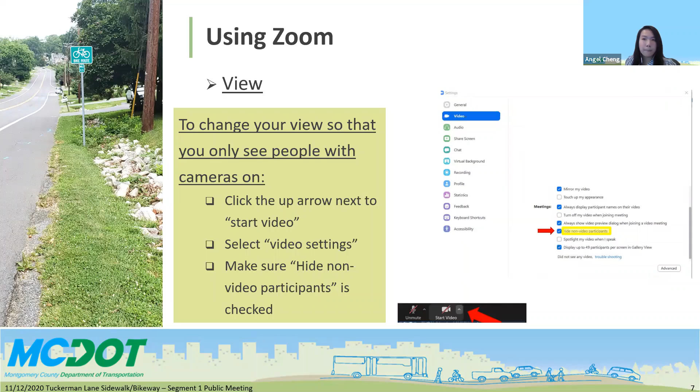We'll have a brief introduction. Hi everyone, my name is Angel Cheng. I am the project manager for this Tuckerman Lane Sidewalk and Bikeway project. We welcome everyone again tonight for joining us for the public meeting. We also have staff from other agencies, including Park and Planning and Maryland State Highway.

At this point, I'd like to ask if there are any elected officials or representatives here representing elected officials—if so, please raise your hand. Okay, no? That's okay, so we'll get started with the presentation.

Again, my name is Angel Cheng, and I am the project manager for this project. Here's a little outline for tonight's meeting: we'll talk about the project overview, go over some of the design considerations in developing this project, discuss the preliminary design we've put together so far, go through the impact analysis summary to explain what it means to build this project, talk about next steps and what happens after tonight's meeting, and then open the floor for everyone to ask questions or make comments.

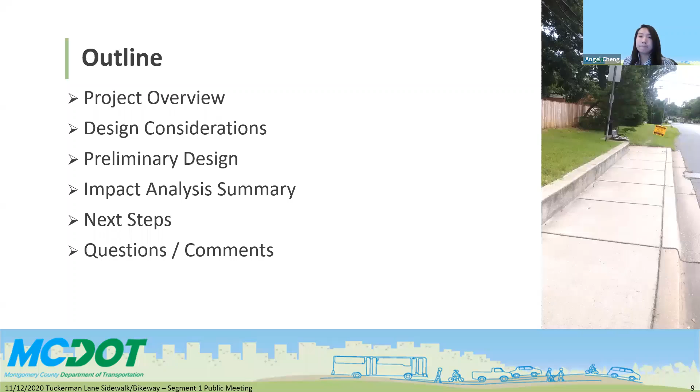Tonight's meeting outcomes are really just to share the preliminary designs with the community and to collect feedback from the community, see what you guys think about our project, and to answer any questions that you might have.

A quick project overview: this is Tuckerman Lane from Falls Road to Snakeden Branch, which is segment 1 of our Tuckerman Lane sidewalk and bikeway project. The scope of the project is to provide a shared use path along the north side of Tuckerman Lane, a sidewalk along the south side, as well as on-road bike lanes in both directions. We're also looking at how we can improve drainage and put in stormwater management facilities. This project is not currently funded for final design or construction.

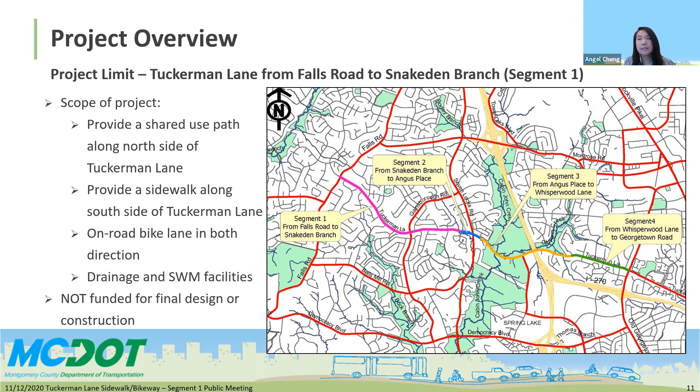A little bit about the milestone schedule: we're currently in preliminary engineering, also known as facility planning phase 2. In this phase, we have a selected alternative from phase 1, which the county council identified and recommended. We're moving this project toward the preliminary engineering phase, also known as the 35% design. This project is not yet funded for final design or construction, but we would like to hear from the community. We collect public input throughout the whole stretch of the project.

Some of the design considerations for this project: obviously safety. We're considering safety improvements for all users, including pedestrians, cyclists, and drivers. We're looking into right-of-way and property impacts as a result of this project. We looked at providing lighting for these facilities, utility poles, and fire hydrants lining Tuckerman Lane, and obviously there are trees on both sides of the road. Drainage and stormwater management is a huge consideration for us, as well as pavement usage, buffer, transit, and bus stops.

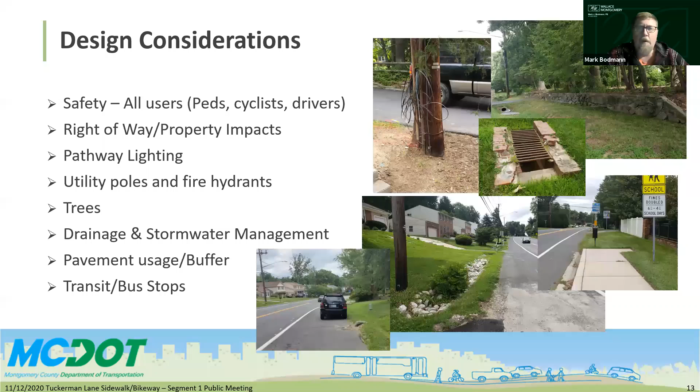Hello everybody, I'm Mark Bodmann, project manager for Wallace Montgomery and Associates, working with the county on this project.

I want to go through a little bit of the existing conditions, then look at what we looked at from phase 1, and then where we came to after that, after looking at some of the impacts. The existing section is typically a 2-lane roadway with shoulders and open section. For non-engineer speak, that just means the roadway drains to ditches along the side of the road, and that's where the stormwater drainage goes. There is street parking on both sides, utilities lining both corridors, as Angel said, and there are some sections with sidewalks and some without.

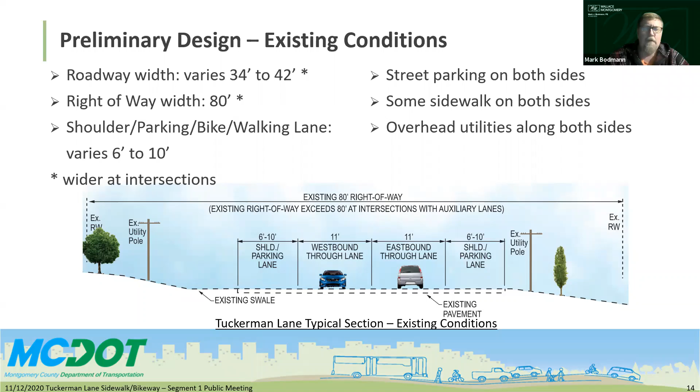So we were looking at trying to upgrade this. From phase 1, what they looked at implementing was maintaining the 2 travel lanes, adding bike lanes, and still providing the open section with drainage swales, with a shared use path on the north side and a sidewalk along the south side. We would maintain parking along the north side as well, and all of that would try to fit within the right of way. That's where we picked it up and started looking at some of the impacts.

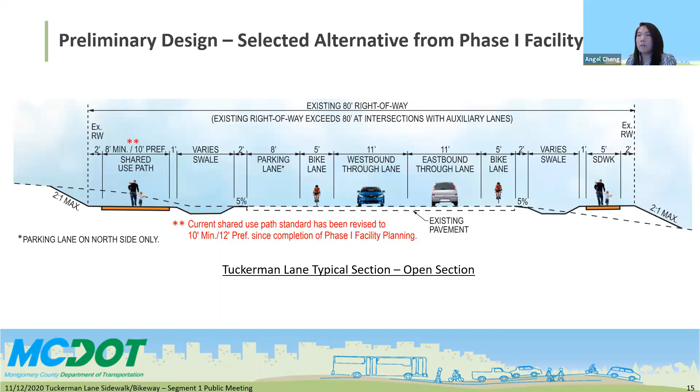Let me move back. This presentation is also posted on the project website, so I'll send out the link to everyone who registered for the meeting, so that everyone can get to it easily.

Here's the typical section for the closed section. We're proposing a shared use path on the north side, 10-foot minimum currently, and an on-road bike lane, 6 foot in each direction. And there's a sidewalk on the south side of Tuckerman.

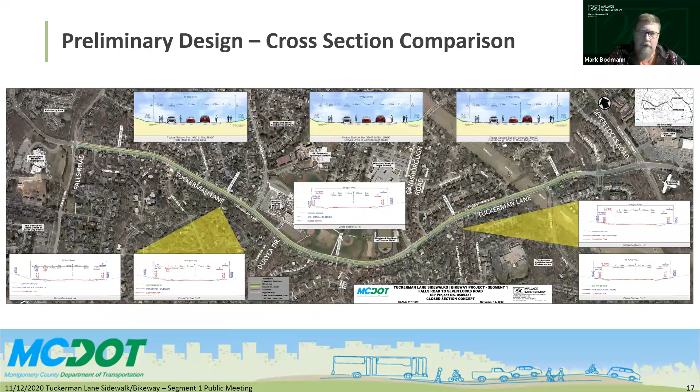Question: have you considered the effect of vehicles turning on and off of Tuckerman as it relates to crossing the sidewalk and the bike path? Yes, at each of the side streets we do a sight distance evaluation to make sure vehicles can adequately see up the road in either direction. The crossings themselves at the side streets will have crosswalks and ADA ramps to ensure safe crossing. So yes, that is taken into consideration as part of our design evaluation when we lay out the alignment and geometry of the roadway.

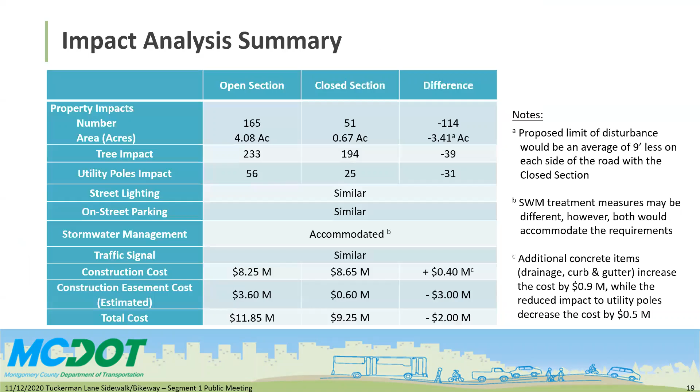Question about how people will know the results of what we've looked into. Yes, so we will update our project website once we reach the 35% design, and we will share that. If you can also email me with a specific question, I'll make sure I get back to you. There are a lot of comments and questions tonight, so if you can email me after this, it'll be really appreciated, because it'll help me make sure I look into it - I already took notes on this, so I will look into it and get back to you.

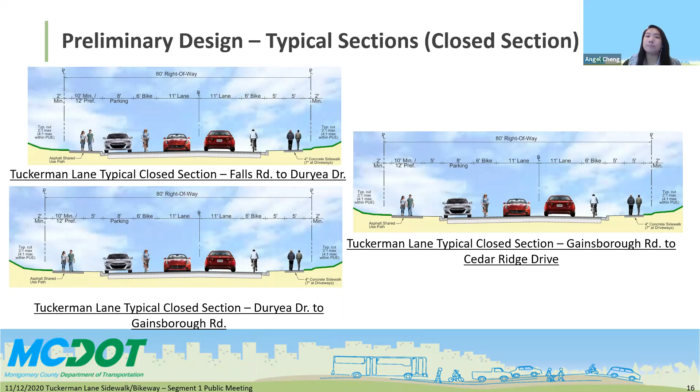Again, if you can fill out that online comment form, it will be very helpful to us to consolidate all these comments in one place, so that we know what the community is feeling about this whole project, whether there are things they'd like to see changed, pieces they don't agree with, or pieces they'd love to see move forward. So please share your feedback with us, this is where we really need your help.